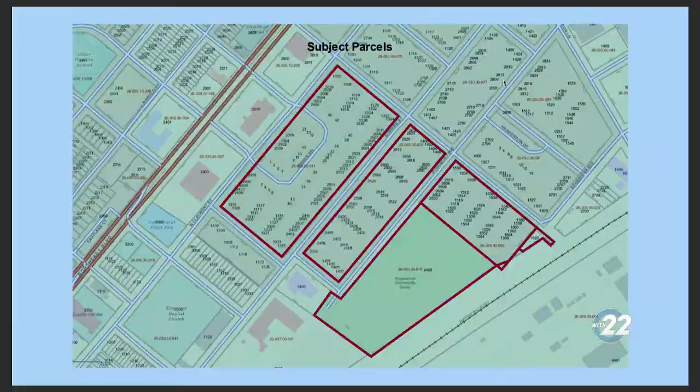Next slide, please. This subdivision and street dedication actions will support the next phase of the $700 million 8-phase Riverside Housing Redevelopment Project in Northeast Wilmington. Due to the large area of territory to be subdivided and to receive newly dedicated street segments, curbs, and sidewalks built to city standards, for legibility, there are 2 major subdivision sheets.

This slide illustrates the western territory of the subdivision bounded by North Claymont Street, East 24th Street, Rosemont Avenue, and East 27th Street. The yellow shaded segments of East 25th Street and East 26th Street are proposed to create a traditional neighborhood street grid and eliminate the existing 1950s era elongated block design that currently exists.

The new segment of East 25th Street shown here is 350 feet long by 50 feet wide. The 2 new segments of East 26th Street shown here are 660 feet long by 70 feet wide. Next slide, please.

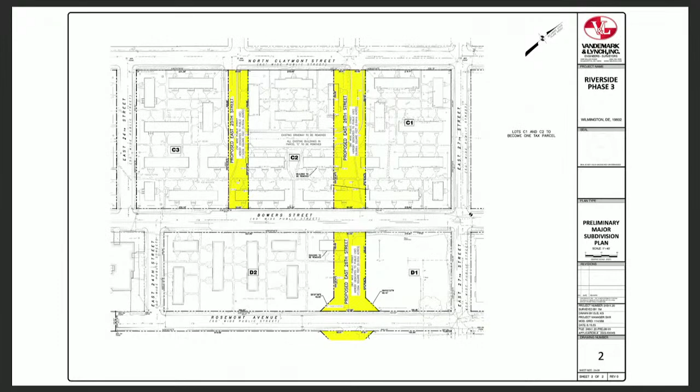This slide illustrates the eastern territory bounded by Rosemont Avenue, the northern parcel of Kingswood Community Center property, the Amtrak Railway Viaduct, and East 27th Street. The yellow shaded segments of East 26th Street, Rosemont Avenue, and Edgemore Avenue shown here are proposed to create a more traditional neighborhood street grid, and more importantly, will allow vehicular access to the new Kingswood Community Center's parking lot.

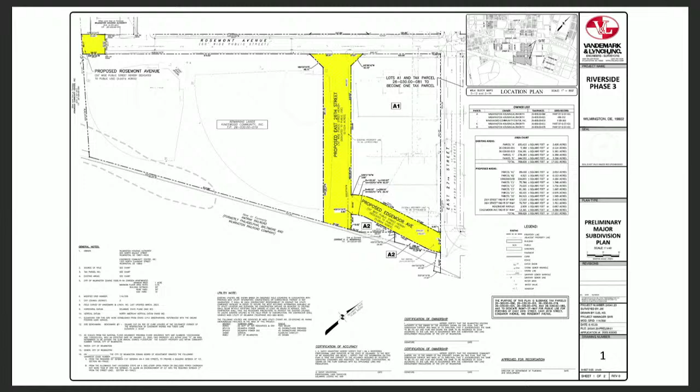The one new segment of East 26th Street shown here is 436 feet long by 80 feet wide. Overall, the three new segments of East 26th Street proposed to be built between North Claymont and the Amtrak Railway Viaduct right-of-way are 1,086 feet in length. The proposed curving segment of Edgemore Avenue is approximately 168 feet long by 50 feet wide. The proposed segment of Rosemont Avenue at top left is 58 feet long by 50 feet wide. Next slide, please.

In conclusion, these plan sheets were circulated to city departments in August of 2023. The Department of Public Works is in support of the plan and the new city street segments. The Fire Marshal's Office had no comment, and the City Planning Commission reviewed the plans and adopted Resolution 423, which recommends approval of the applicant's request.

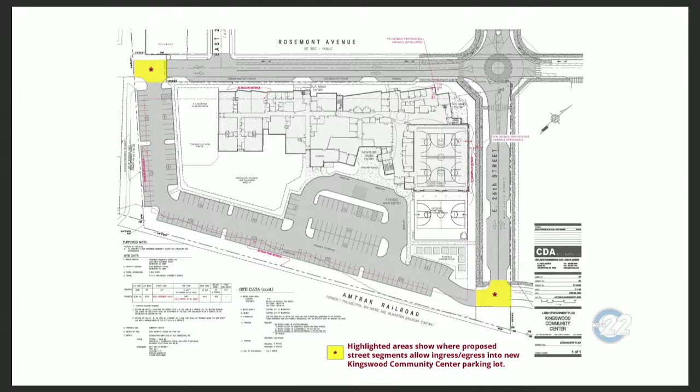Thank you, Mr. Kirk, that was very thorough. So from looking at the map, I guess my first question is, there's going to be a circle? Circles are always so much safer than streetlights. The roundabout there, okay. It looks very clear to me, and progress is definitely being made over there, and I'm very excited about that new developed area of the city.

Are there any questions from the committee in reference to the presentation by Mr. Kirk? Councilman White: Mr. Kirk, the roundabout, is that below Governor Printz at 26th? East of, yes. So that'll be the roundabout right off of Governor Printz on the Vandever... is it further up? Well, it's at 26th Street, so it would be further north. Right past the Dollar Tree, Dollar General area?

Who's responsible for the improvements? The developer. But the city will maintain them? I believe so, yes. In terms of maintaining, like plowing? Correct, yes.

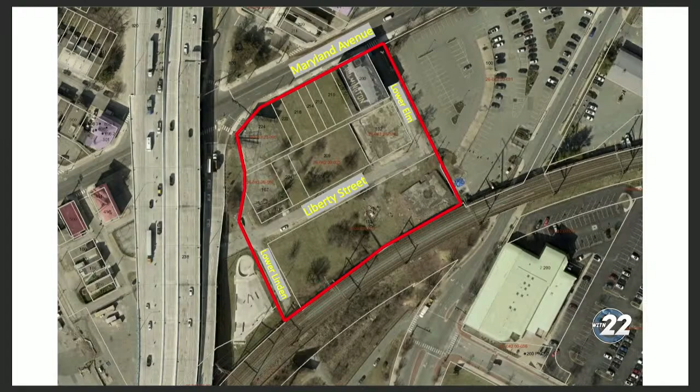This subdivision involves 1 mostly vacant 2.7-acre site bounded by Lower Elm Street, the Amtrak Railway Viaduct, Lower Linden Street, as well as the northbound exit ramp of Interstate 95 and Maryland Avenue, and currently consists of 2 separate city blocks. The site was rezoned from M1, or light manufacturing, to C2, or secondary business centers zoning district, in December 2022 in City Planning Commission Resolution 9-22.

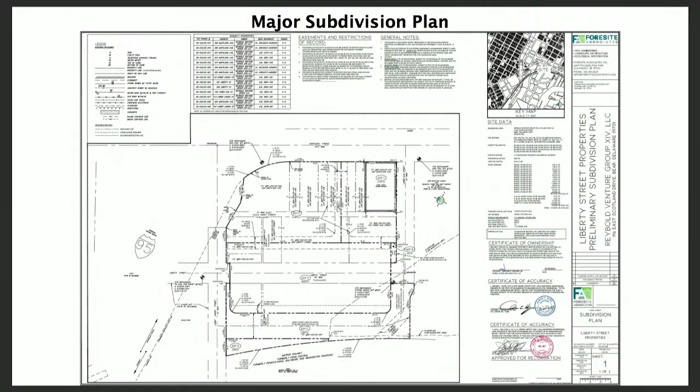City Council passed Ordinance 22-050 supporting this rezoning on January 19th, 2023. Next slide, please.

The plan proposes to subdivide the site into parcels 1 through 6, illustrated here in red outlines and blue numbering. Note that the only existing building on the site is contained in parcel 1.

A vacant 4-story industrial building at 200 Maryland Avenue that will be renovated into 19 apartments as part of this project. Next slide, please.

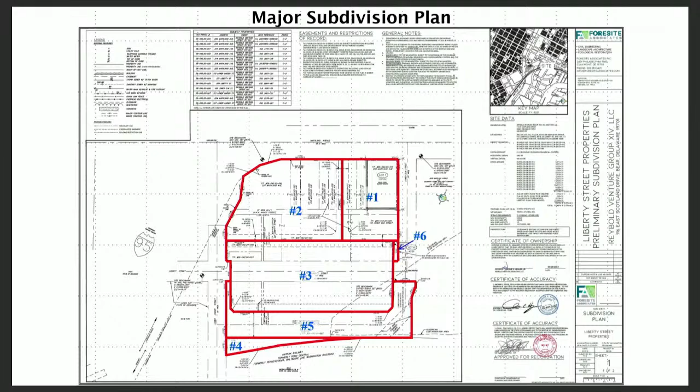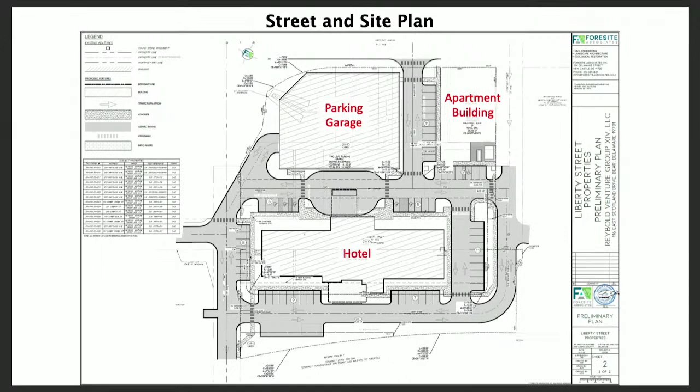This slide illustrates the developer's plan to build 4 segments of 24-foot wide, 2-way private streets, as well as curbs and sidewalks constructed to city standards to serve the renovated apartment building, a 2-story, 80-space parking garage, and a 4-story, 111-unit hotel. These private streets will connect the existing and proposed buildings to each other, to Maryland Avenue, and to Lower Elm and Lower Linden Street, therefore facilitating improved circulation patterns for this development, as well as the adjacent Wilmington Skate Park. Next slide, please.

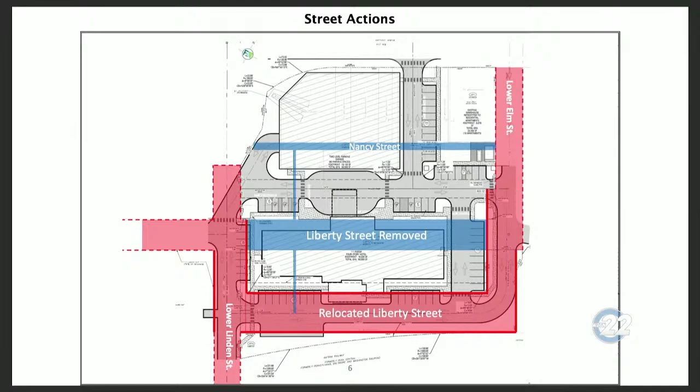Thank you. Thank you very much, Mr. Kirk. At this time, is there anyone from the Committee on City Council that has any questions of Mr. Kirk? I wanted him to speak before me, I'm sorry. Is that okay, Madam Chair? Go ahead, Councilwoman Harley. You go first, and then we'll entertain questions.

Thank you. I want to thank John for that thorough explanation in terms of the purpose of why this legislation is being presented.

I really am excited about this area and how the hotel and apartments will enhance and improve how that area looks aesthetically. For those not sure where it is, it's along Maryland Avenue near the I-95 underpass, where there have been a lot of businesses not operating for a long time. Bringing these projects to that area is definitely going to be an uplift to the community, but more importantly, I'm excited about the jobs it will bring, especially for the hotel, and new players in the game as it relates to hotels and new options.

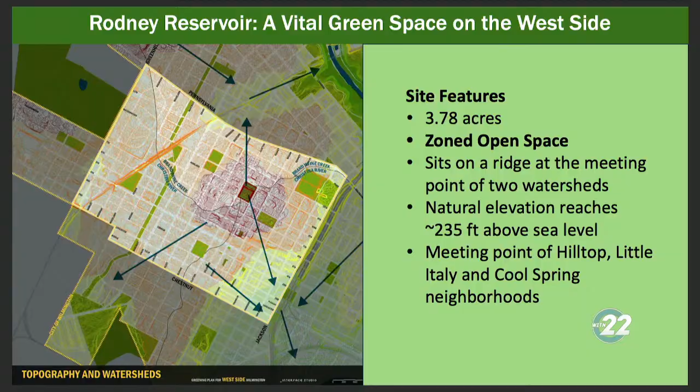Let's look to the next slide, please. And what's underneath it? So what is the site? It is a 7.5 million gallon tank, a concrete tank, reinforced with rebar, and this huge piece of public infrastructure that was buried at the site in 1916.

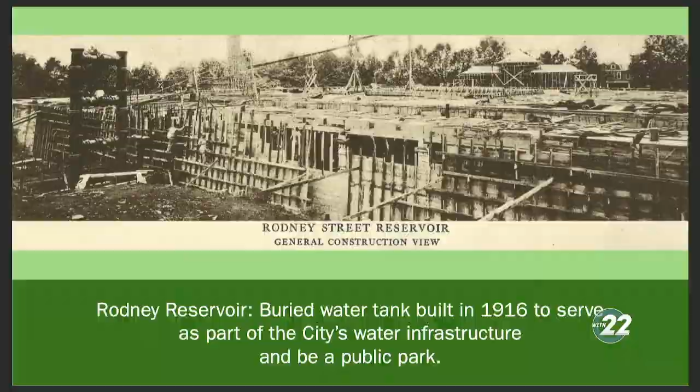We can go to the next slide, please. From the beginning, this site wasn't just infrastructure. It was always infrastructure and green space and a public park. It is some of Wilmington's earliest parkland, and it's never been privately developed. Before the tank went in, there were open basins, and there was a famous baseball diamond there for a while. When they put in the tank in 1916, they had the foresight to build a roller/ice skating rink on top. You can see that in 1919, this observation tower was put in, and you could see for 4 states, with all kinds of events taking place up there.

Can we go to the next slide, please? And when you talk to neighbors, they have all kinds of memories of the place. We heard some again last night at the working group meeting - people sledding, having PE up there. A lot of people, Mr. Starkey's here, played football or other organized sports who lived in the neighborhood. We all hear from neighbors who used to scale that tower as well for fun.

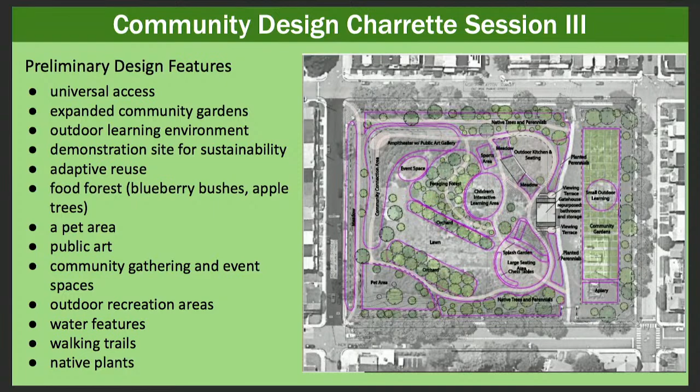Out of it, we had this vision for a nature and community-focused park that had this opportunity to deliver on goals that are in the comprehensive plan for 2028 for Wilmington and in the Resilient Wilmington report.

Right now, we have this opportunity with the working group that's gotten going to use a robust community planning process, to work with professional landscape architects to create this amazing park that can meet our community's need to access nature, improve our environment, address things like heat island effect, and address stormwater runoff, those kinds of things.

So we have the Rodney Reservoir working group that got started. We had been advocating for it for over a year. We were so excited when it got going in July. We faced some constraints of time and budget, and also this lack of formal commitment on the part of the city to make a good faith effort to build the park that we designed. We hear that, and a lack of funding in place for it. But nonetheless, we, with city workers and community members, have come together around a commitment to create a design for a park following out of that vision of the charrette.

And we had a really positive RFP process. We put together an RFP. We had an amazing site visit with over a dozen landscape architects coming out.

Through the meeting with landscape architects, we heard they were amazed at the site, saw this amazing opportunity for placemaking at the site, and an opportunity to build on the history of the site, and they were amazed at our community engagement.

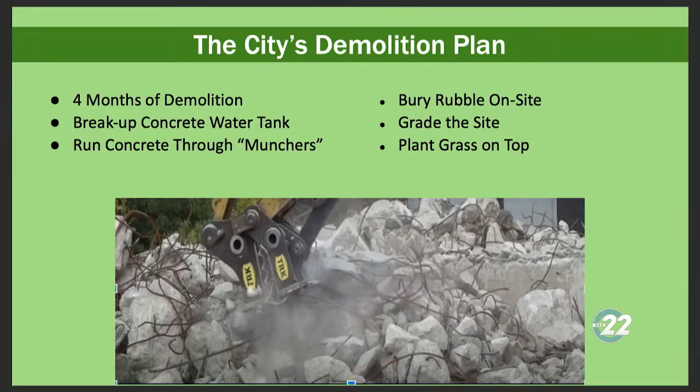We're concerned that the city didn't initially have any plans to do environmental testing, but we, as a community, advocated for it. Here are some of the most recent results: they have found unacceptable cancer risk under a resident scenario, and non-cancer risk to children in a resident scenario.

We're concerned that the city hasn't yet done any modeling to test for the actual demolition scenario when hazardous substances would be released. We'd be seeing a release of hazardous substances through the disturbance of soil and the munching of concrete. So we're asking City Council to help out and to prioritize our health.

There are a couple of opportunities right here. We can have a site-specific contaminated materials plan that would allow us to identify the materials and have a plan for that. We can use these as planning tools. And DNREC strongly recommended that the city follow the HSCA guideline process, and we're asking City Council to go ahead and support that and move that forward.

What this means is that, in our mind, this fits into the comprehensive planning framework that the Bond Bill Committee had for us. This is approaching site work strategically. We can go to the next slide here.

We have an opportunity. We learned about this from the firms in our presentations, that there are ways to do site work strategically, and so we want to build on that. We are looking for a comprehensive plan to complete the design for the site before we begin demolition.

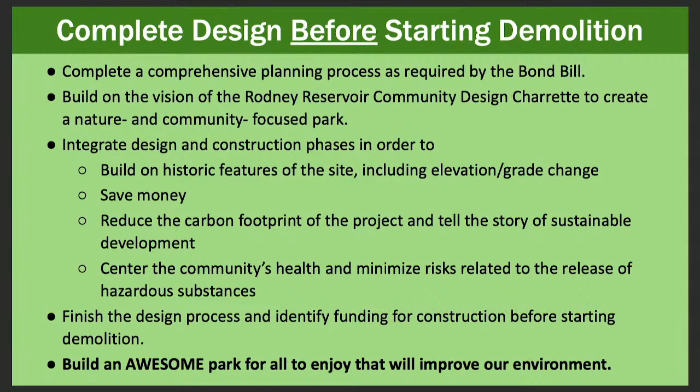If you have any questions in reference to the presentation, very, very nicely done. I love the enthusiasm, and as someone who loves green spaces, it's a beautiful vision. So let's see how we can work together to make that happen. Of course, I want to hear also from the city on what the plans are moving forward so that the community feels that the communication is there.

As we know, the working group was put together with different members of the community, including the city, and I believe Councilmember Fields may be on that. No? Okay, so are there any council members—no, there's no elected officials on the committee. Okay, all right. Well, either way, you'll keep us abreast of this.

Are there any questions right now that my council members would like to ask? Not at this time, Madam Chair.